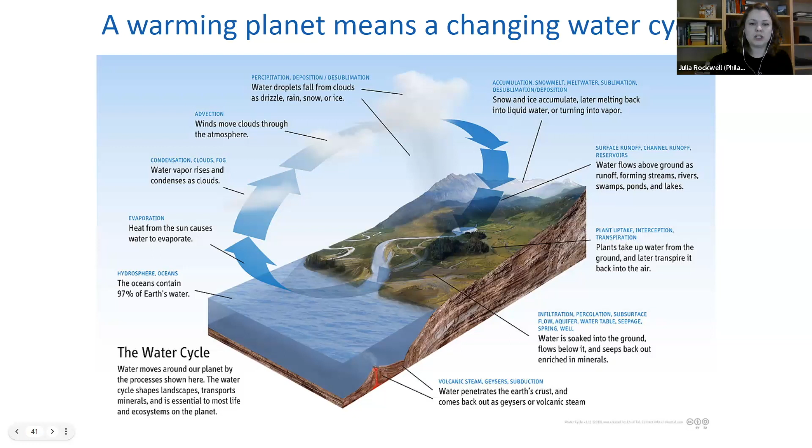And the first major theme we're going to talk about is the fact that climate change is water change. So next slide. What we mean by this is that as the atmosphere is warming, it is directly impacting the hydrologic cycle. And that's what this illustration is showing here, right? A cycle that I'm sure we're all very familiar with and includes processes like condensation, precipitation, evaporation, and transpiration. If you go to the next slide.

And there are actually three main principles that help us understand how specifically climate change is affecting the water cycle. The first principle is that of atmospheric holding capacity, which is just a fancy way of saying that warmer air holds more moisture than cooler air. And if you're a PWDer, you have seen this sponge slide before. So we like to use the sponge analogy, which basically says that if the atmosphere is a sponge, the warmer it gets, the bigger the sponge gets. So it's able to retain more moisture before releasing it. And this leads to more intense precipitation events and can also lead to longer dry periods in between precipitation events.

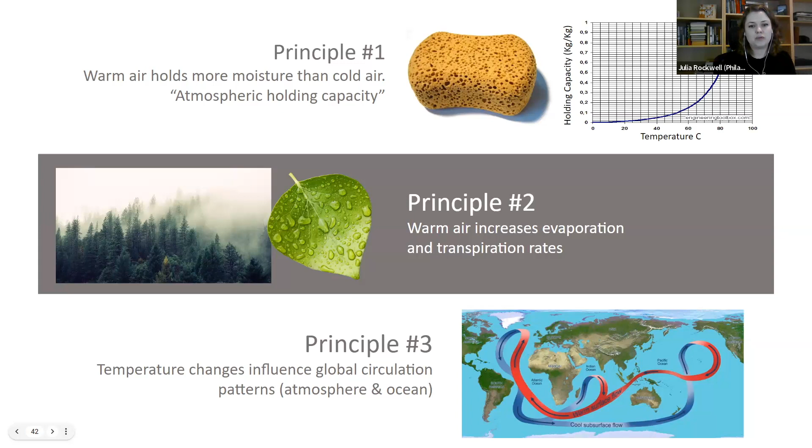The second principle is fairly straightforward. It's that warm air increases evaporation and transpiration rates, which directly impacts the water cycle. And then the third principle is that temperature changes influence global circulation patterns in the atmosphere and ocean. And these circulation patterns also affect weather patterns like El Nino and La Nina, which in the past water resource managers have used to help make planning decisions, especially in the realm of drinking water supply planning. Next slide.

So there is another water cycle that we need to talk about since we're talking about water management at water utilities, and that is sometimes referred to as the urban water cycle, which is shown here. This cycle is basically relevant at localized scales and in densely urbanized city centers like Philadelphia and New York. And if we start at the top of the cycle, we have a drinking water supply for utilities. That drinking water is treated and distributed to our customers who then use that drinking water. And then as utilities, we collect the wastewater from customers as well as stormwater from rainfall events and channel all of that wastewater and stormwater to our treatment facilities, which then discharge treated effluent into our receiving waters.

And in some locations, receiving waters can directly impact drinking water supplies, especially when we're dealing with surface water supplies like rivers. And we know that climate change is impacting all of these different components of the urban water cycle. And if you click forward once, I'll go through a series of these impacts with some photos. So one impact is that as air temperatures are warming, they're also warming our water temperatures in our surface water supplies. And this can degrade water quality, leading to things like harmful algal blooms. This photo is of the Schuylkill River in Philadelphia, and this is showing growth of a harmless plant called duckweed, but we are concerned that we might start to see things like harmful algal blooms in the future.

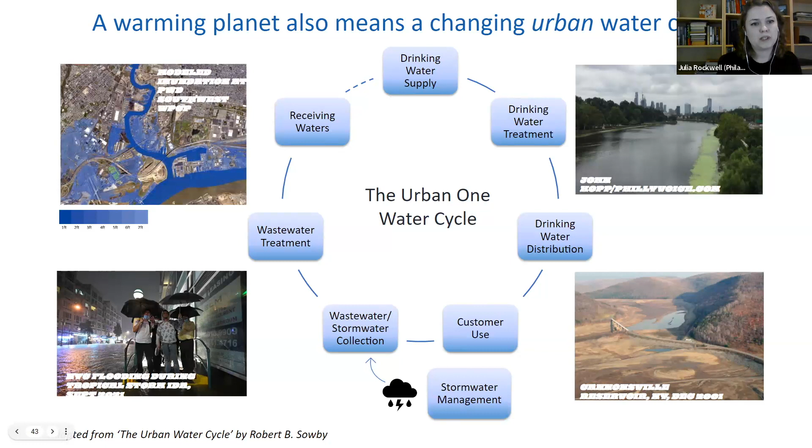And then the last impact I'll point out is sea level rise. We face a lot of risks related to sea level rise. One of those is inundation of some of our critical infrastructure in coastal communities in the Delaware River Basin. And PWD has been studying this risk extensively. This GIF is going through an animation showing 1 through 7 feet of sea level rise in the vicinity of our Southwest Water Pollution Control Plant, which is our most vulnerable treatment facility to sea level rise. So next slide.

Alan and I also really wanted to point out that in the context of the urban one water cycle, New York City DEP and PWD services touch on all these different components of the cycle. So we're sometimes referred to as combined utilities or one water utilities. And PWD specifically provides drinking water to about 1.7 million customers by treating and delivering over 300 million gallons per day. And the source of our drinking water are surface water supplies, the Schuylkill and Delaware rivers specifically. We also collect and treat over 522 million gallons per day of wastewater. And we manage stormwater through a collection system that is 60% of a combined system, which means that the wastewater and stormwater flow into the same set of pipes in 60% of the city, and then the other 40% of the city is served by a separate sewer system. Next slide.

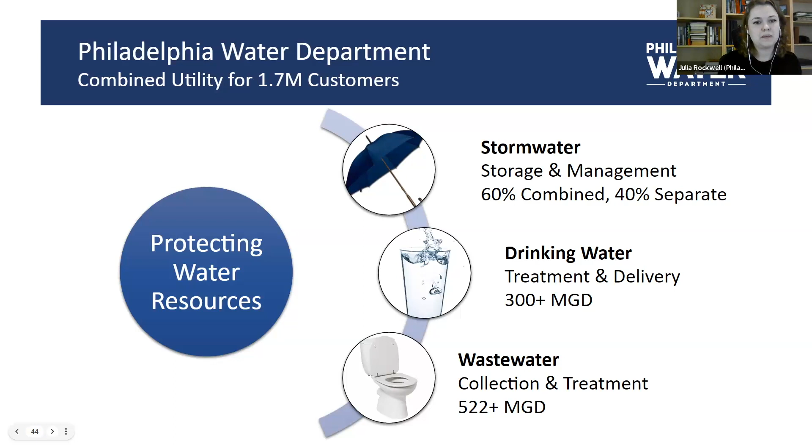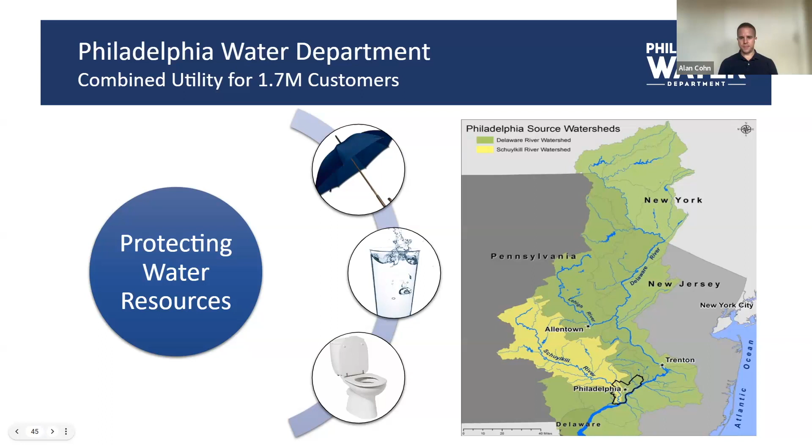I'm going to now just briefly hand it to Alan to talk about New York City DEP's services. Thanks, Julia. Next slide, please. So just very briefly before I hand it right back to Julia.

So New York City DEP, as many of you likely already know, serves over 9 million customers, delivering over 1 billion gallons of water per day. So you can see from the last slide, we have the overlapping areas from the Catskill Delaware watershed, but a larger watershed that also includes the Croton system just north of the city. All of that makes its way to New York City, and we have a lot of common themes with Philadelphia in that we have a combined sewer system, partially combined, partially separate.

We treat and discharge wastewater from 14 wastewater treatment plants in the city. And one key difference is that we're discharging to essentially the Atlantic Ocean. So it's a once-through system, but we increasingly want to consider the whole water cycle and ways to maximize efficiency, conserve water, and so forth. And with that, I will pass it back to you, Julia.

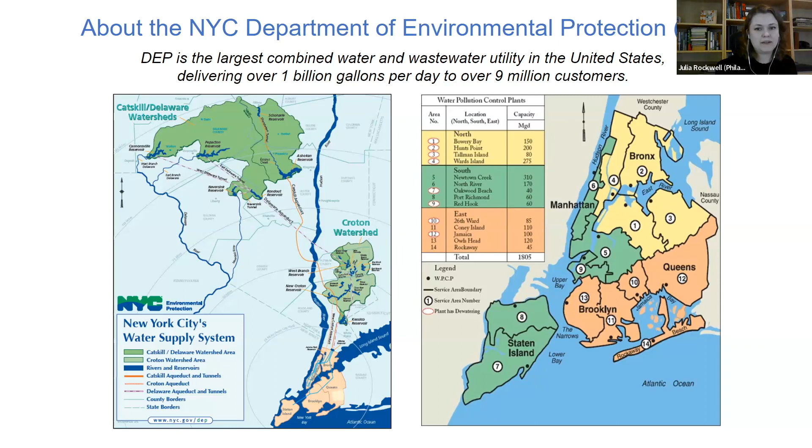Great, thanks, Alan. So if we go to the next slide, the next major theme or topic we want to review with you all is what we're calling the water utility context. Basically, we're trying to answer the question, what are some of the main factors we as water resource managers need to consider to ensure the provision of safe, reliable, and equitable services in a changing climate?

If you go to the next slide, one of these major factors is regulatory compliance. And regulatory compliance is really the primary driver for water, wastewater, stormwater infrastructure investments. Utilities need to meet regulations and standards under the Safe Drinking Water Act and the Clean Water Act. And in the Delaware River Basin, through the Delaware River Basin Commission, or DRBC, we also have water quantity and quality standards that reflect the fact that the waters of the basin are a shared resource.

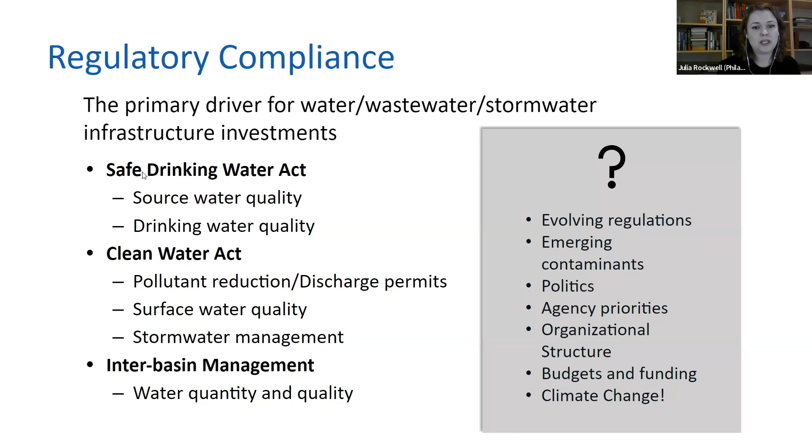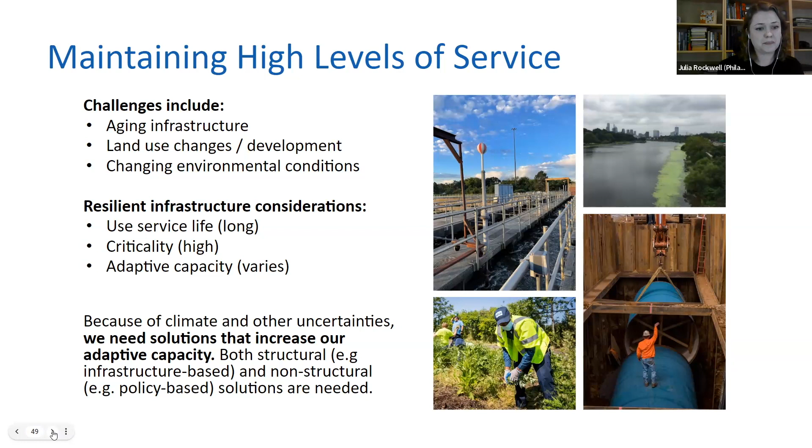But something to highlight here is that because of climate change and all the other uncertainties we're facing, we need solutions as utilities that will increase our adaptive capacity. And both structural solutions like in systems and assets and non-structural solutions like policies need to be considered in this context. So I'm going to pass it off to Alan to keep going through some of the main considerations. Thanks, Julia. Next slide, please.

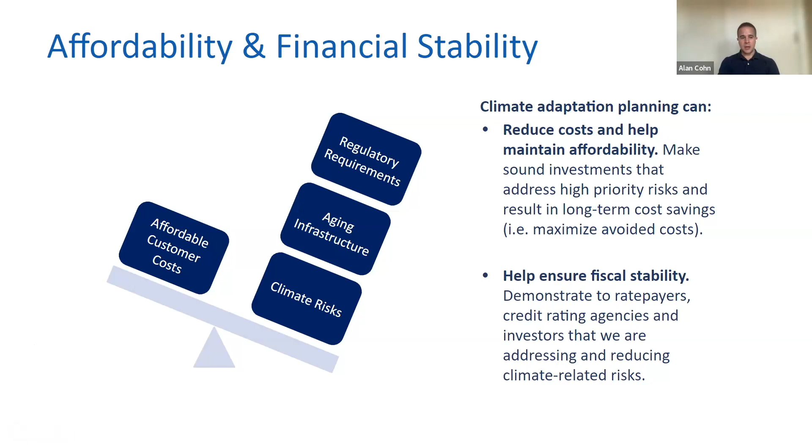Over the last couple of decades, the funding that we had received from the federal government to invest in our systems has dwindled quite a bit, but we are eager to see that investment increasing over the last couple of years with the IRA and other federal funding. So again, we really want to be able to strike this balance. And if you go to the next slide, just to summarize.

All right. Okay, we continue the tag team. So we only have a couple minutes left. So I think we're going to go pretty quickly through some examples of adaptation and One Water management in practice at New York City DEP and PWD. If you go to the next slide.

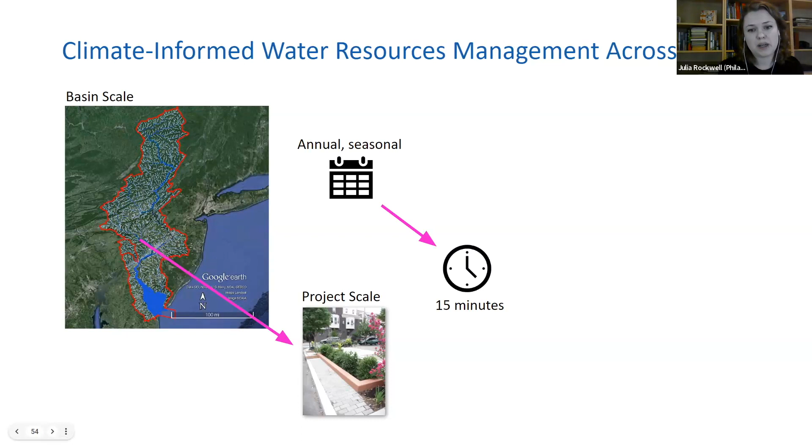across a really wide range of temporal scales with the data and models that we work with. So depending on the application, we can be working with annual or seasonal data, all the way down to sub-hourly or even 15-minute data. And that's particularly used when we're trying to model and understand the performance of our urban drainage systems. If you click forward.

So across all these scales, we need to be able to effectively apply climate change information and science. And this is a bit of a complicated matter because the projections we're using come from global climate models, or GCMs. And as the name implies, these models are simulating processes and developing output on really global scales, at much lower resolutions than what we need to perform a lot of the risk assessments and analyses that we do as utilities.

So this is something that I think we might get into discussion a bit more throughout the workshop, and I think Dan and Abby might touch on this as well, but definitely something to keep in the back of our heads as we talk about the science and its applications. Next slide.

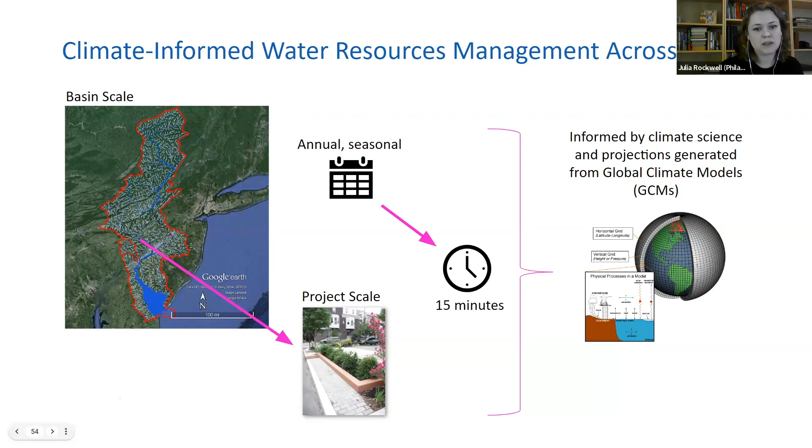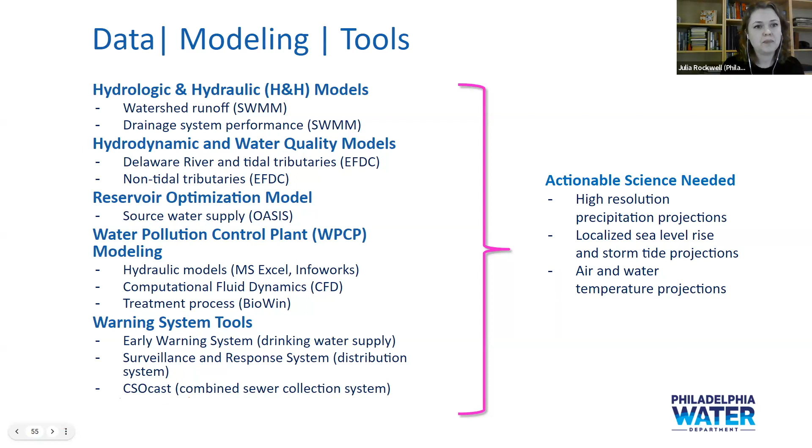Another example I'd like to highlight that goes back to the point I made earlier that Philadelphia is at the bottom of the Delaware River Basin watershed is the fact that partnerships are very important to us. And one of our most successful examples of watershed scale coordination is the Schuylkill Action Network, or SAN. SAN was established in 2003 and was started with an EPA grant in the amount of $1.15 million. Since then, millions have been leveraged for on-the-ground implementation of best management practices that have helped to improve our water quality in the Schuylkill River watershed and deal with sources of pollution like abandoned mine drainage, stormwater and agricultural runoff, and point source discharges. Next slide.

Now going back in scale, more back down to the project scale, our climate change adaptation program has developed a set of climate resilient planning and design guidance that provides information to our staff and consultants on what projections they can use in their work, specifically in their infrastructure planning and design work. And this is really our fundamental reference document for mainstreaming the use of climate change information at PWD. And a big shout out to my team members, Sega, Ashley, and Allison, who are currently working through an update to this guidance document, because as we all know, the science is ever evolving. So it is a living document.

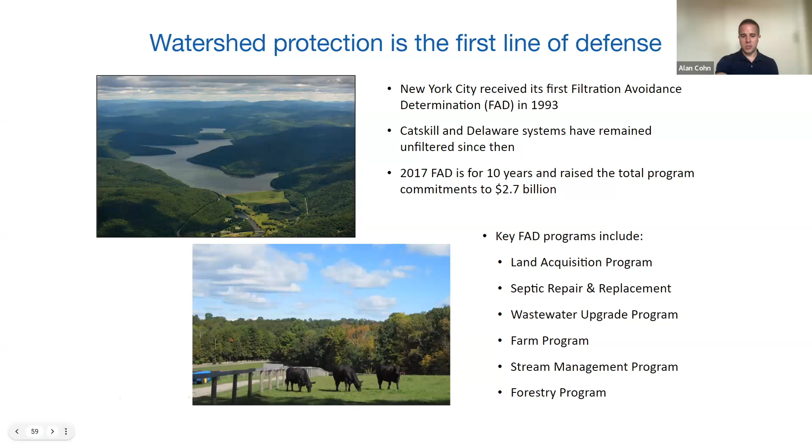So if you go one more, most of you may already be familiar with the New York City Watershed Protection Program and the filtration avoidance determination. And this is really one of our regional examples of green infrastructure, which we're now applying in city to the green infrastructure program that Julia mentioned, which is helping us with other issues like combined sewer overflow. In the watershed, this continues to be a multiple layers of defense approach, where we're investing in many different programs instead of a large centralized filtration facility. Next slide, please. We still do need to make improvements and prepare for gray infrastructure investments. This is an example of a connection within the system that allows us to throttle supply when there's high turbidity. Next slide, please.

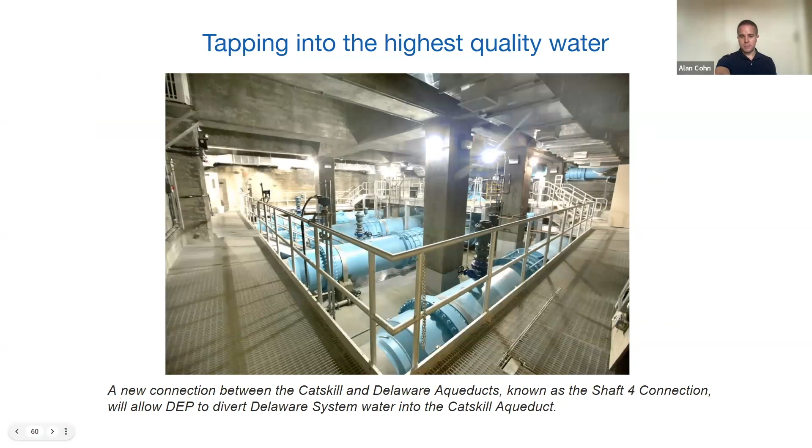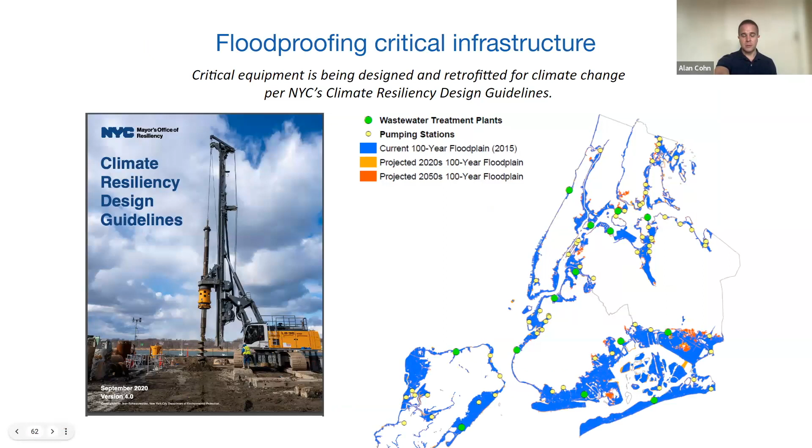And we are also looking increasingly at how do we let water in. So there's the first line of defense, which is infiltration through green stormwater infrastructure. But once all of our sewers are full and the ground is saturated, can we actually create areas that can flood safely? And this is what we're calling our cloudburst approach. Next slide.

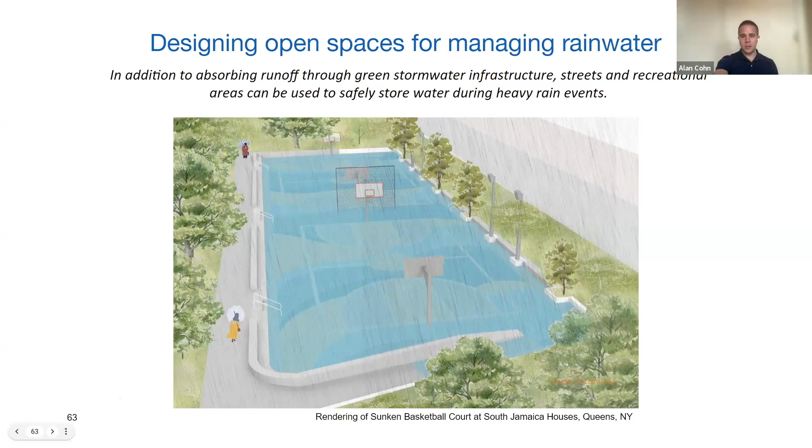So finally, just to bring it back full circle, we can't wait for perfect information necessarily. So how can we make decisions with the information we have available? How can we better work with climate scientists to co-create actionable science at the local and basin scales? And how do we develop flexible and adaptable processes and solutions? All right, thank you.